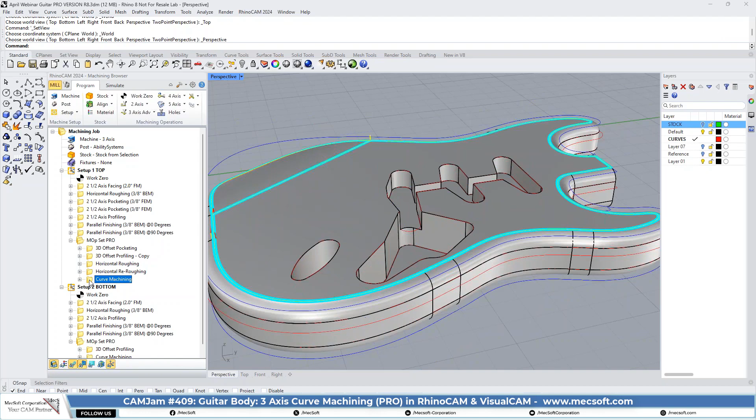Professional configuration. And then also another one that I like is the curve machining. What we did here is we used these two curves that we already have around this perimeter and that perimeter. So basically what it does is it places a toolpath, projects the toolpath down onto the part model along this curve. You can go along the curve or you can go across the curve.

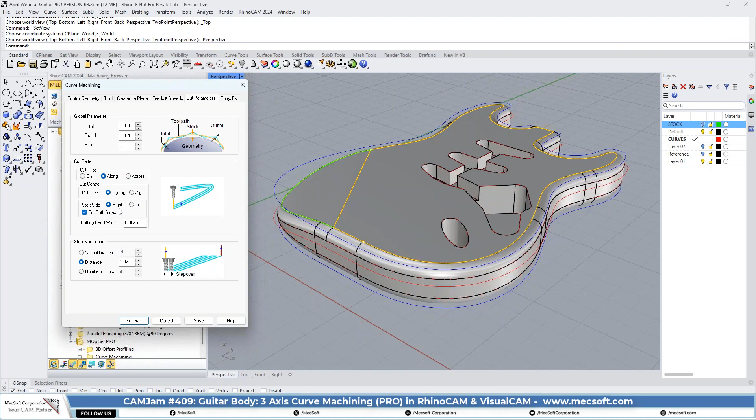We're just going along the curve, and we're using a zigzag cut pattern. We're starting on the right. It's going to cut both sides, so it's cutting 1/16 of an inch on both sides. Okay, and here's the step over. And obviously your entry exit.

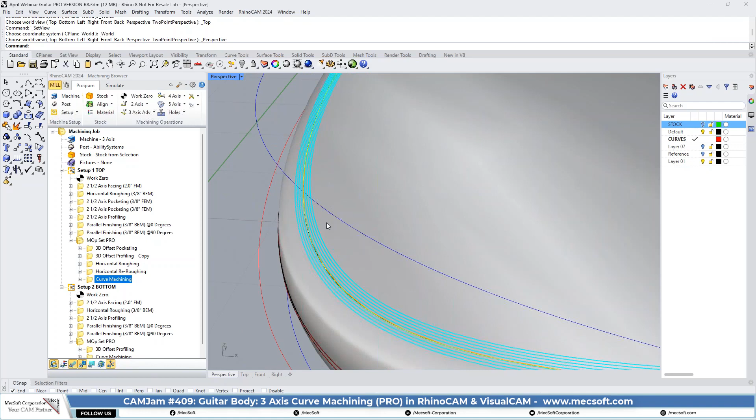What this does is it allows you to have a constant, well, I don't think this one is a constant, I think it's just a projection, but it allows you to have a cleanup area, a bandwidth along any curve. So if you have some maybe scalloping or some witness lines around where these fillets meet the top, or when this fillet meets this fillet, you can clean those up using this cut pattern. Really good option to use.

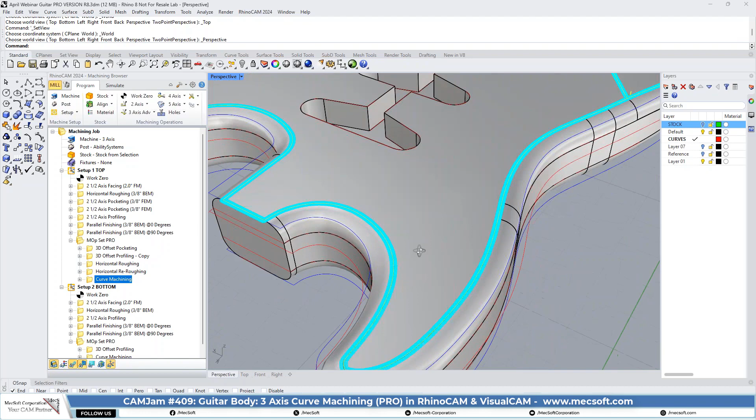As you can see in the professional, you get a lot more options in the 3-axis, more advanced options for machining, and most of these relate to a better part finish, a higher degree of accuracy. When you're done cutting, possibly less rework, less hand sanding, or maybe just go over it with an emery cloth just to clean that up a little bit. But these toolpath methods will pretty much get it almost all the way done for you.